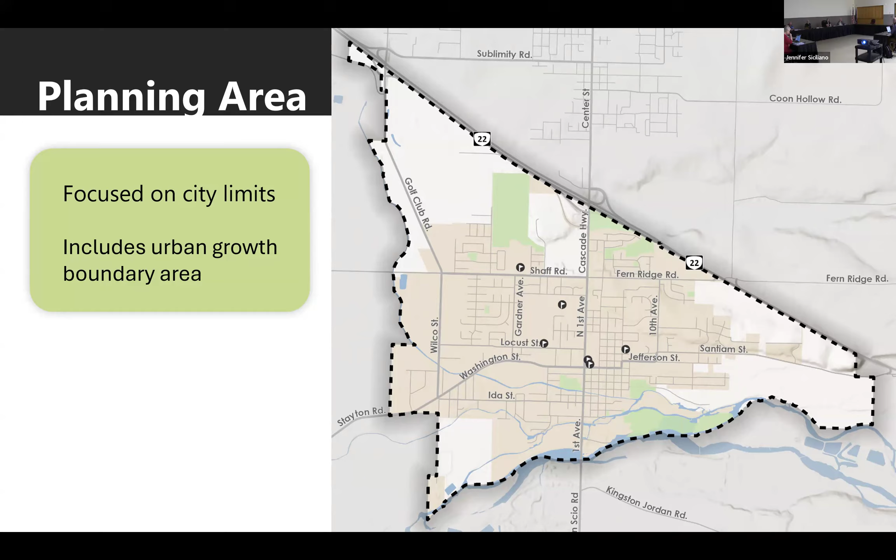On engagement, we had several committees. The Public Advisory Committee met earlier this evening. We've had a project management team meeting with staff, as well as a technical advisory committee with police department, county staff, even some technical residents and others as part of the technical advisory committee. The roles for these committees and groups has really helped us guide the development of the plan, review all of the interim memorandums, a lot of the technical work, and promoted awareness with the plan as we worked on that.

Public events, we've held two public open houses. I believe one was in this room and then the other was over at the library. We held them early in the process. We then developed an understanding of the needs, the local context and experience of people walking, biking, driving in Stayton. We went back out and presented the safety countermeasures and recommendations, got additional feedback on those. And then the Public Advisory Committee has now met twice. With that, I'll pass it to my colleague here, Amy Griffiths, to give an overview of more of the technical work and the needs around safety in Stayton.

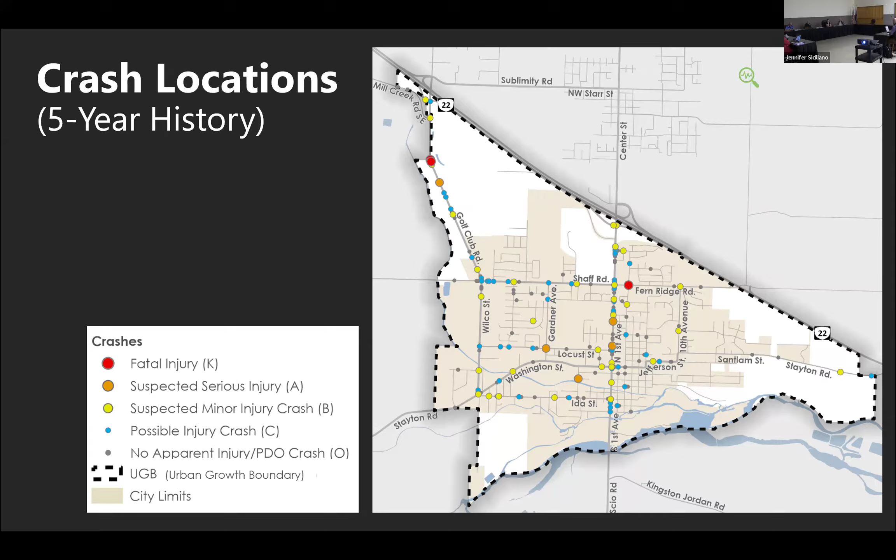We also looked at the available roadway network data and understood where there are gaps in pedestrian and bicycle facilities, where there are arterial roadways with higher volumes and higher speeds of vehicles, where there are roadways with higher posted speeds, and where there are key activity generators where we expect vulnerable users who need extra safety, including senior centers, schools, and parks.

There are two things that need to be present for a crash to occur: exposure, meaning someone has to be there, and speed, which is related to kinetic energy transfer, so higher speeds mean crashes will be more severe. We looked at these proven risk factors based on available data to identify high-risk locations.

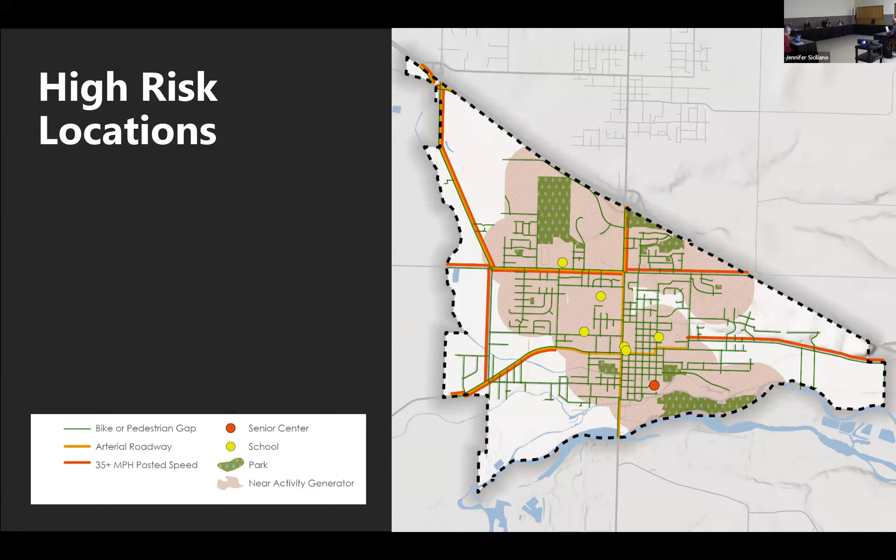We then developed what we call a composite risk and injury network. Safety is proactive, so we looked both at where there is a history of severe crashes or frequency of crashes, developing a high injury network, and then overlaying those risk factors to identify a composite risk and injury network. We mapped where the history of crashes overlaps with the risk for crashes.

Golf Club Road has both of those characteristics present. Washington Street has both of those characteristics present. Cascade Highway has both of those characteristics present. And First Avenue has a high concentration of crashes and more severe crashes.

So this is one piece of the existing conditions analysis, understanding in Stayton where there is risk or severity of crashes, so that we can identify improvements to address those locations.

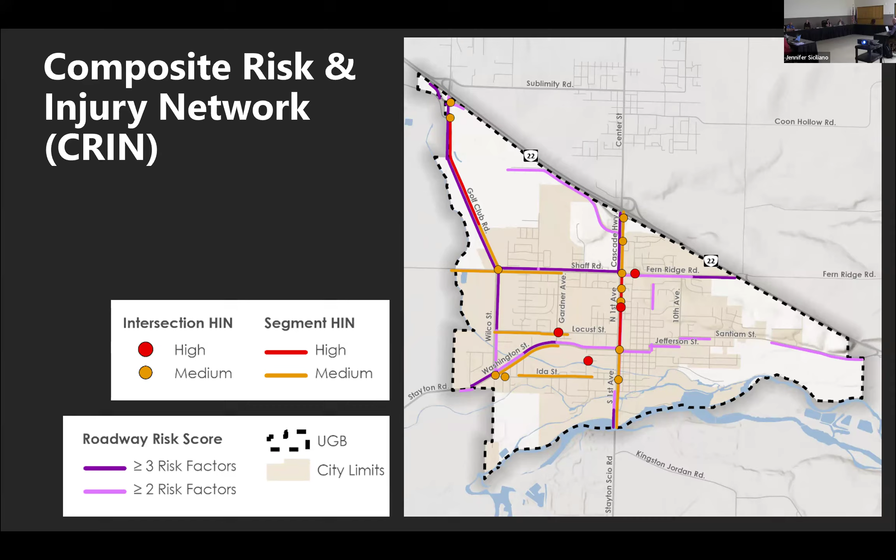We also developed emphasis areas, looking at characteristics in common among the crashes: where are those crashes happening, who is most at risk of experiencing fatal and serious injury crashes, and what contributing factors are there.

The 3 emphasis areas in Stayton include intersections. Compared to roadway segments, intersections are more likely to have crashes and are more likely to have more severe crashes. This is common in urban areas because where there are overlapping paths at an intersection, it's more likely that a crash could occur. In some more rural areas you might see the reverse, because along segments there are high speeds. There's more focus on intersections within this plan.

Vulnerable road users—people walking, biking, using mobility devices, and motorcyclists—are more likely to be seriously injured or killed if a crash occurs. They don't have the same protection as vehicle drivers do, so even if a crash occurs at a lower speed, it's still more likely to be more severe. We have to pay special attention to creating safe environments for those vulnerable road users.

Risky driver behaviors—impairment, speeding, and distracted driving—led to more crashes occurring and more severe crashes occurring, especially speeding and impairment leading to higher severity of crashes. So those two factors, along with this map.

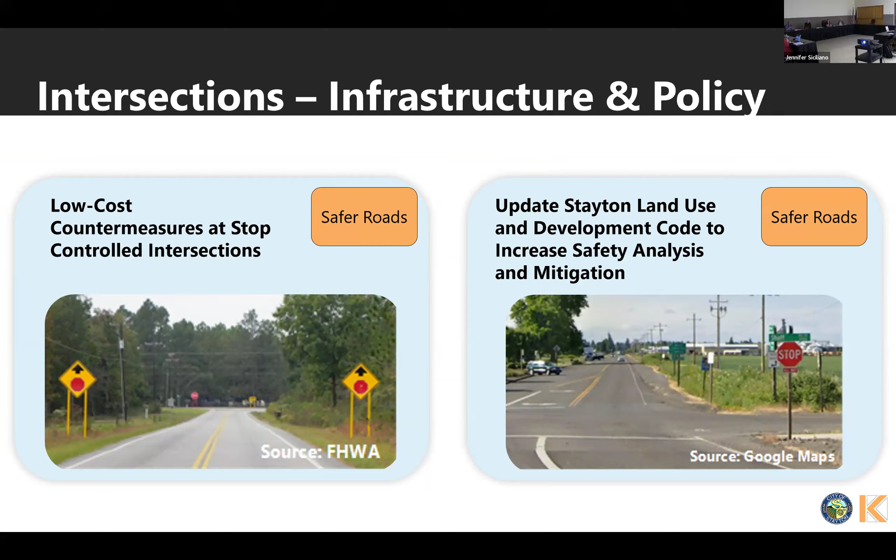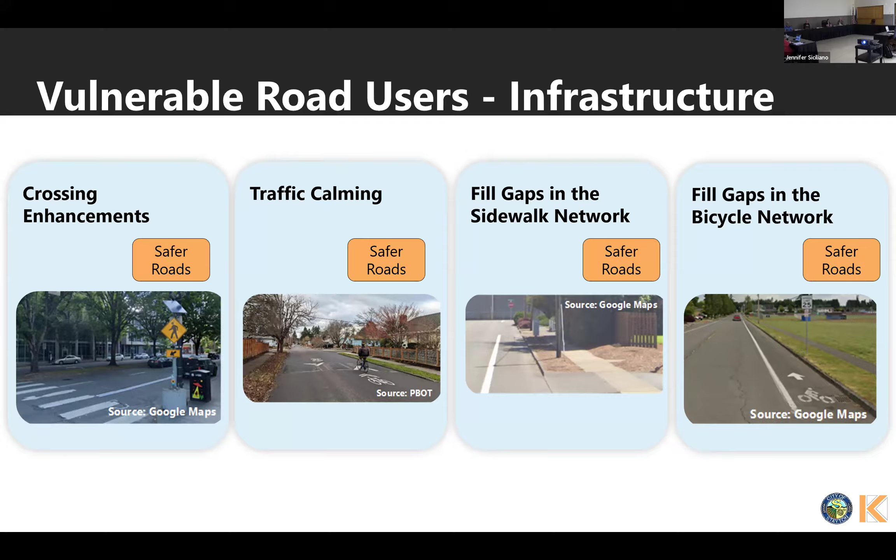The low-cost countermeasures, as I've shown, are the advanced warning signs; the updated land use development code again is more of a policy. For vulnerable road users, we have an image of an improved crossing with a warning sign, traffic calming which could be a speed hump or several other features we talked about in the plan, filling in sidewalk gaps, and filling in bicycle gaps. We've got the policies I just talked about.

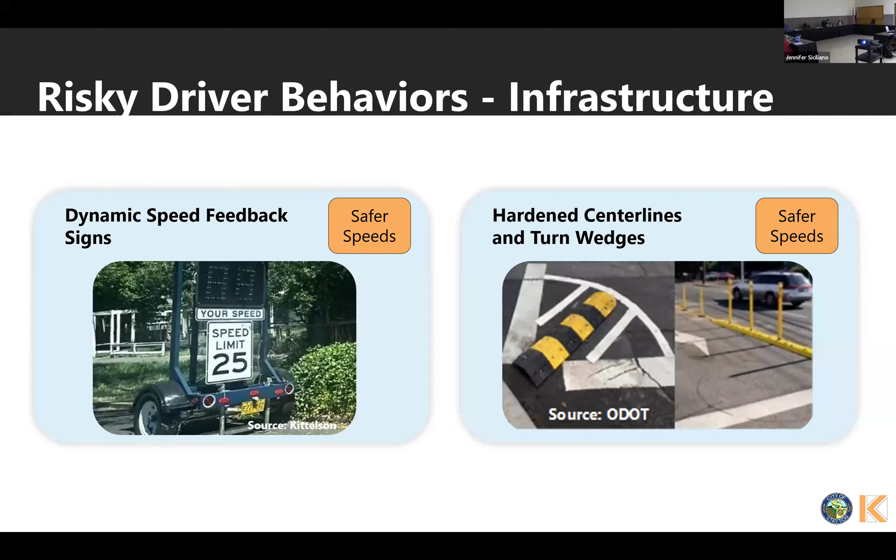For risky driver behaviors, this image shows a movable speed feedback sign that you can move around the city to help encourage people on different streets to travel the posted speed. The hardened center lines and turn wedges are like plastic, sometimes with flex posts sticking up, that really helps with driver compliance. People turn slower and stay in their lanes better, because even trucks can still go over those turn wedges you see on screen, but the average driver will more naturally follow the appropriate path at a slower speed to create better safety for pedestrians as well as all road users.

And then for risky behaviors, we have some policies. One is education campaigns. You guys already have safety towns being implemented in the schools, teaching students roadway safety and emergency response. These are great programs to just continue to expand.

Targeted and high visibility enforcement: using the composite risk and injury network to help identify locations that are good ones for a little bit more enforcement can be a good strategy, making sure that's really focused on where there's the best impact. And then developing automatic traffic enforcement policies and programs.

The language in the plan is really just setting you all up in the future to work on policies that align with best practices. For example, best practices indicate automatic enforcement should always be paired with a speed feedback sign, so people know the speed they're traveling and have an opportunity to slow down before enforcement is used. Also, making sure any ticket revenue from automatic enforcement is reinvested directly into safety at that location is a good way to gather more public support. But this plan is not recommending this in the near term, just recommending setting up the opportunity to follow those best practices when adopted more broadly.

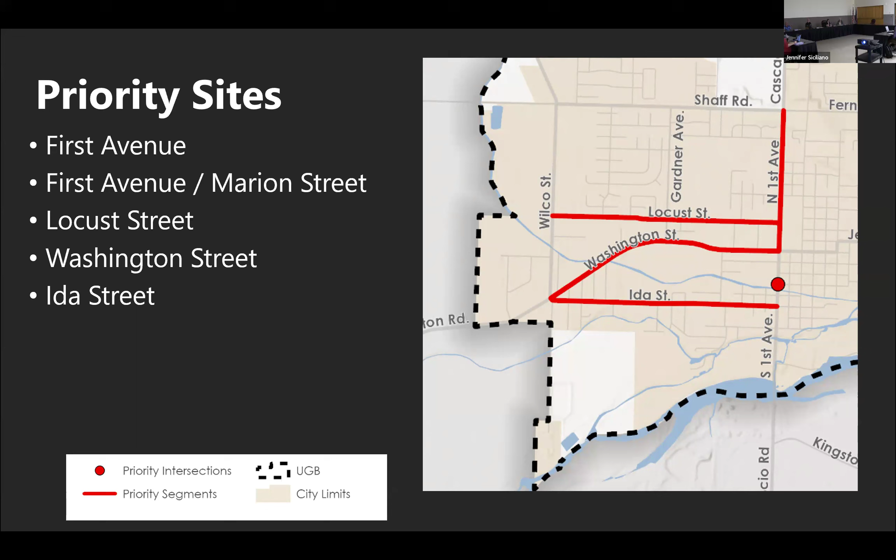So I'm going to talk about what was recommended for each location. First Avenue already has improvements from the county to add a pedestrian crossing at Marion Street, as well as improvements to sidewalks and especially curb ramps. We're also recommending adding speed feedback signs and looking into landscaped medians at a couple locations where there are gaps between driveways, which provides traffic calming and a more comfortable streetscape environment.

We're recommending aligning with the TSP to widen sidewalks. Access management is on the table as well, and the county is interested in that too, but we recognize that might be a longer-term recommendation due to some current public pushback on access management. It would really help with safety, but might be a longer-term need.

Protected left turn phasing would require additional engineering analysis for operations, but looking into changing some signals to add protected left turn phasing, making it protected only, can really improve pedestrian safety. There are other signal improvements that could also be made depending on operations feasibility, such as a leading pedestrian interval to allow pedestrians to cross slightly before vehicles, and enhanced crossings.

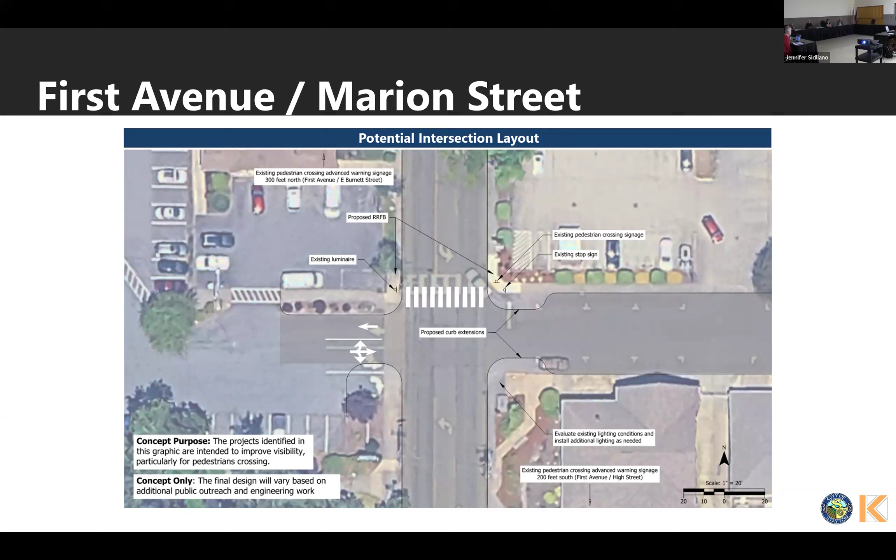Locust Street was the next location. This is a collector roadway in the city, with some schools in the area. Today it's kind of an unstriped roadway, and there are some sidewalk gaps. So we're recommending, consistent with the transportation system plan, adding bike lanes, filling in the sidewalk gaps, widening the sidewalk, and narrowing the travel lanes a little bit, consistent with current best practices from an engineering perspective. Moving fixed objects - there's a location where a couple of fixed objects have been hit multiple times - and then also adding some traffic calming, potentially speed cushions.

There are ways to put those in that make it easier for emergency response to still travel as they need to, but still slow the average driver. Raised intersections, particularly at the intersection with Gardner by the school, chicanes, access management, curb extensions - that's where there are bump-outs in the roadway that shorten crossings and slow speeds - and potentially painted intersections such as at Locust and Gardner. With all of these treatments we worked to be consistent with the transportation system plan, and we include that these are conceptual design only. In the appendix, there are more bullets for what analysis needs to be done, to make sure there's a proper discussion with the public around different trade-offs associated with some of these roadway design elements.

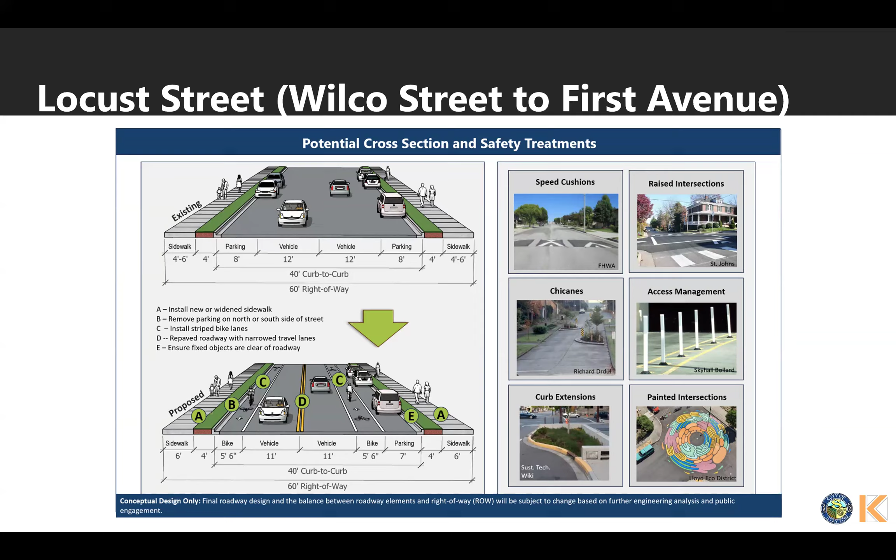From there, Washington - this is I think a major collector roadway, slightly higher classification, but it's definitely a freight route. It might be just a normal collector, but it's definitely a freight route. So this has a little bit of a higher level of treatments than some of the other facilities, and some of the traffic calming elements aren't appropriate given the amount of freight. But we are recommending changing from the skip striping to double yellow lines, which indicates no passing. We heard from the public that especially on the western section of the corridor, people are passing at high speeds, which is not really the intent of the street.

Consistent with the TSP, the Transportation System Plan, we have added bike lanes, widened the sidewalk, and filled sidewalk gaps. We've added crossing enhancements to make it easier to cross the street, raised intersections, potential for painted intersections, access management, trimming vegetation to improve visibility, and advancing the TSP recommendation for a roundabout. Wherever possible we want to be consistent with the transportation system plan, and then identify the further analysis that would need to be done before implementation.

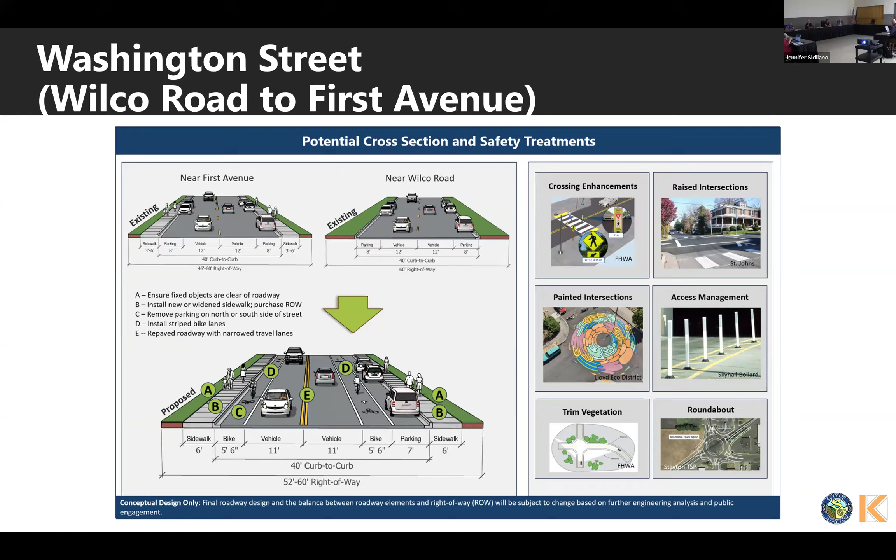Ida Street is the third location, and for this one the transportation system plan only indicates sharrows. So we've recommended installing sidewalks where there are gaps, repaving and restriping the roadway with a solid center line, again to help make the street feel a little smaller, installing sharrows, ensuring fixed objects are clear of the roadway, speed cushions, raised intersections, and again curb extensions to shorten pedestrian crossings, improving crossings at a couple key locations, potentially painted intersections, and again advancing the roundabout at the intersection between Ida, Washington, and Wilco.

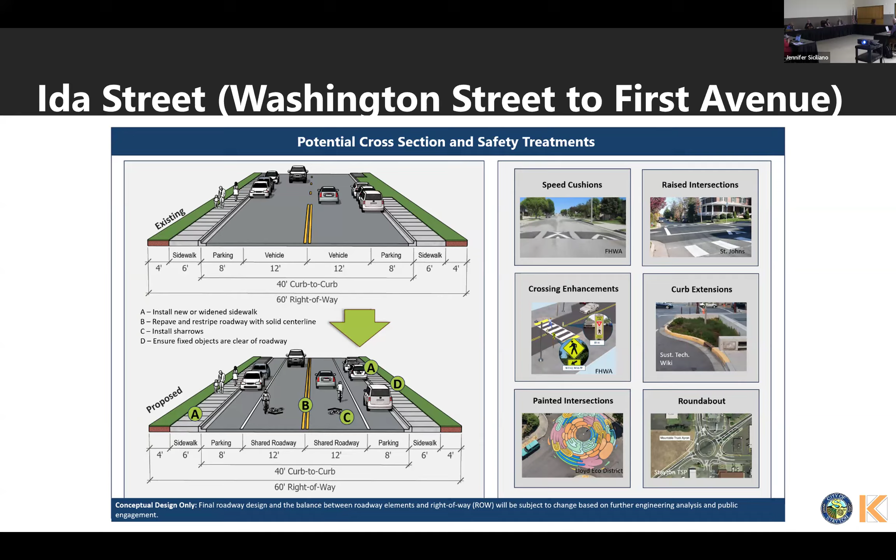We walked some of these corridors, and as you guys all experience these corridors, there's not high parking utilization, so striping the roadway really helps visually for drivers to understand that it's not just a big wide open road where you can travel quickly, but somewhere you should travel a little more slowly and be aware of the people living right along the roadway. So those are the strategies and recommendations we've identified, and we use some of those visuals we showed today to help support grant applications that can be attached. They're really intended to help scope what a project would include in the design phase.

Prioritization. Another requirement of the Safe Streets and Roads for All (SS4A) requirements is that you prioritize projects into timeframes based on clear criteria.

We use the following criteria: expected safety performance. There are published crash reduction factors associated with the treatments described today, as well as the safe system approach, which has a hierarchy of how big of an improvement or crash reduction you're expecting from that treatment. Things like installing sidewalks are high benefit because they physically separate users in the roadway, so those score high for that type of treatment.

The amount of time, energy, or cost required for implementation was also considered. If it's easy to implement or low cost, that makes it a better candidate for near-term implementation. But if it takes a long time, it would be more in the long term.